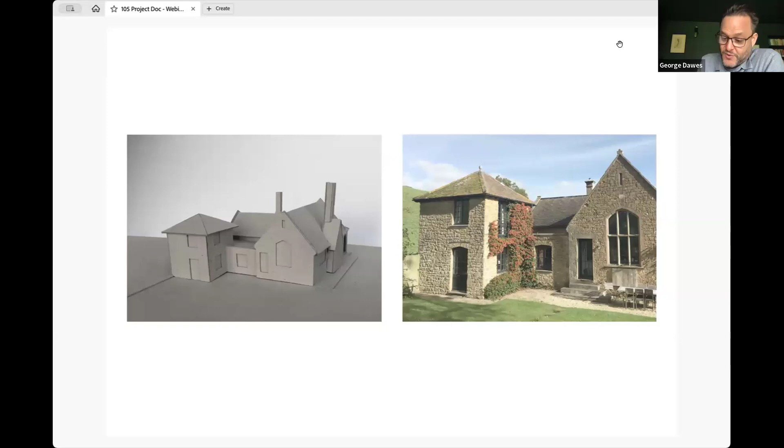So the proposal was to demolish the 70s extension, which was a useful process because it basically allowed us to go back to the original school building, which are these 2 elements.

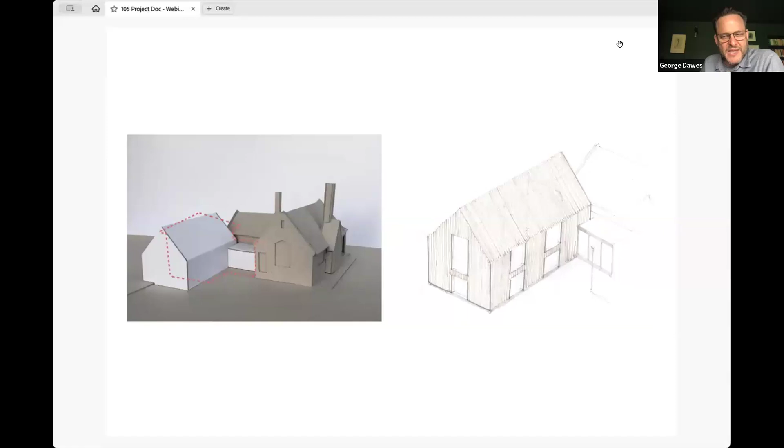Early on we came up with this idea of producing something that mimicked the original schoolhouse building, the main part of the schoolhouse, so it had the same massing, the same height, similar eaves, similar floor plan, but that it was clearly a contemporary extension, unlike the extension in the 70s that almost looked like it belonged in terms of its material and detailing. This is clearly contemporary, so that it's read as a later extension.

So this is the plan of the original building. The red was the 70s extension, and you can see how it overlapped the original building in a slightly unsatisfactory way. The idea with the new extension was to come away from it slightly.

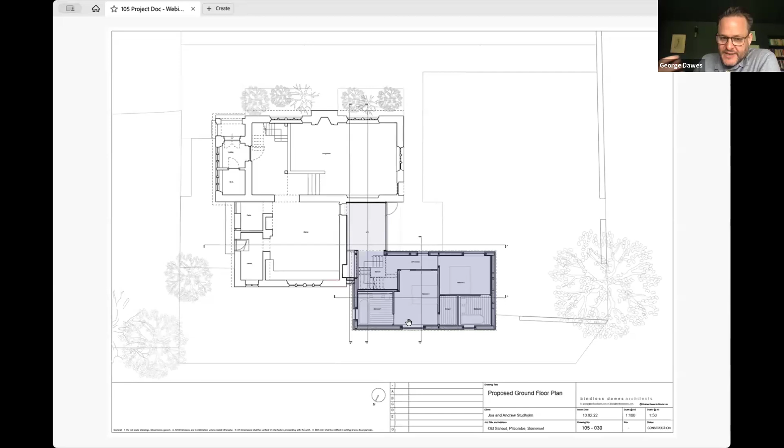There was still a link building, this section here, which is quite glazed, and there's a flat roofed element that's more diminutive in its appearance. But the main body of the building is read as a singular piece that stands alone. In terms of the section as well, the original building is above.

You can see the high eaves, and the challenge was to try and keep the building lower, so it had the sense of being a single-story building, although it had to contain still 2 stories worth of bedroom and bathroom. So it's sunk in its lower section.

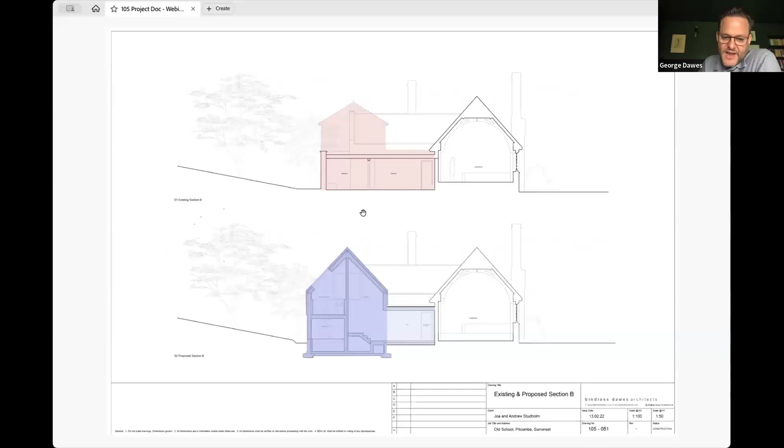So the foundations are in concrete with concrete wall upstands around it, and then on top of that is the timber building that sits over the top.

What's quite unusual about this is that when you're normally asked to do an extension, it's normally for a new kitchen or a new living space. And here what's unusual is the extension is actually the bedrooms.

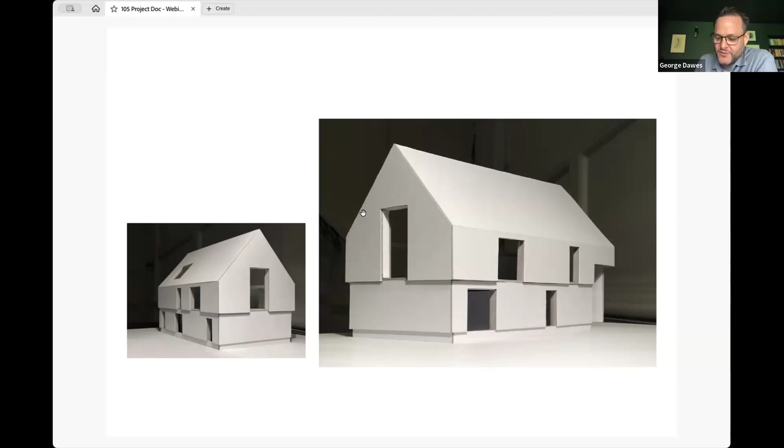So unlike most extensions where you end up with large expanses of glass, there are lots of smaller individual windows that serve different rooms. It's really about making sure the internal spaces capture that 360 quality of the site and utilize that. So that's a little background about the design.

The other big move was what to make it in, and we settled on timber quite early on. An obvious alternative was stone, but stone is more expensive, and although it's locally quarried, it's less sustainable than timber.

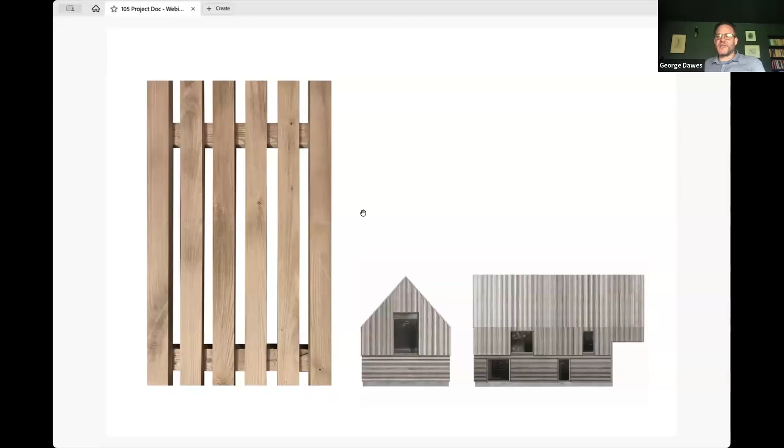Weirdly, I think timber is more contextually suited as well, because if we'd picked the same Hadspen stone, that would have been quite orange for many years before it started to weather and sit comfortably next to the original building. What's interesting about timber is that over time it can weather and silver to a similar tone and color to the original stonework.

As I said before, the shape of the building was very simple, and the desire was to do the whole building in the same material, so it had a singular contemporary quality. But then how to break that massing down - that was where a lot of work was done, testing different cladding combinations.

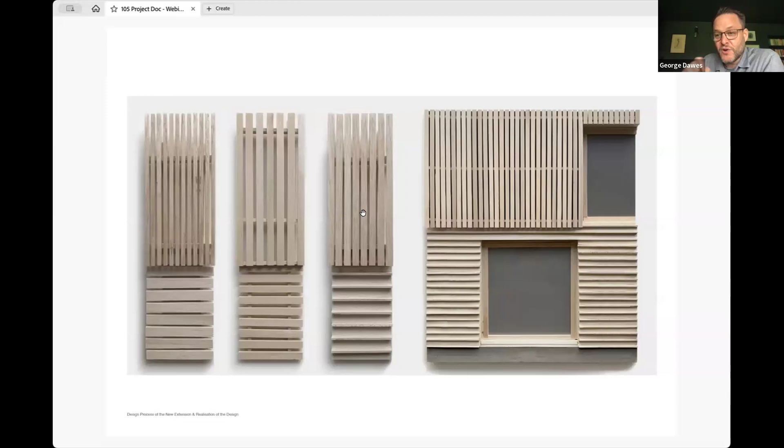We settled on this idea of using vertical cladding on the upper story and the roof. It was important on the roof that you had vertical cladding so the water could go in between the panels and dissipate into a hidden gutter, and then flipping that on the lower portion, taking the same rhythm and inverting it, both in terms of orientation and the smaller elements projecting rather than being gaps between.

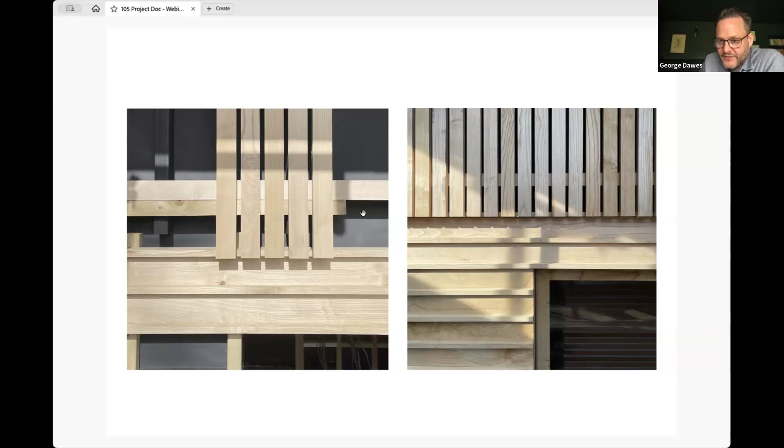These are site photos as it was first going on, and I'll come back to that in a second, and then its final version. The junctions and detailing between windows and corners was very important in trying to get that precision and crafted quality.

That superstructure basically ends up as a sandwich of OSB board with insulation and structural members inside, and OSB board on the outside. Internally, we had a vapor barrier formed using insulation-backed plasterboard, and on the outside was a breather membrane, so any moisture that does get in can escape on the outer side of the building.

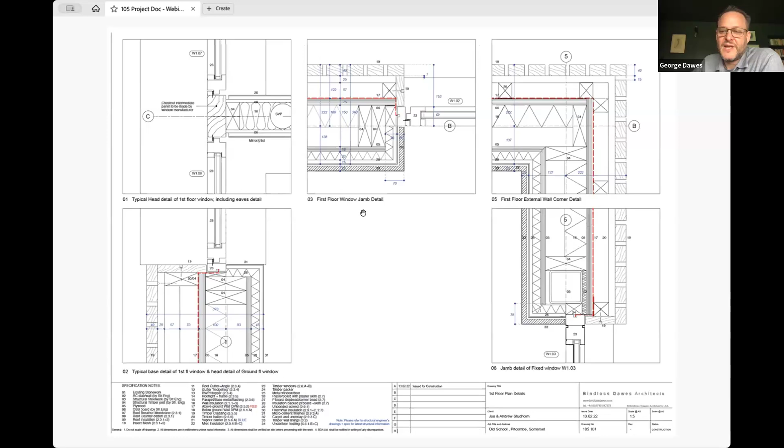And then cladding with the timber directly on the outside. What you can see here, because this is the upper story, is a vertical batten running down, in the direction that water would need to run as it comes through the rain screen cladding, with a horizontal counter batten to support the vertical outer cladding that sits on afterwards.

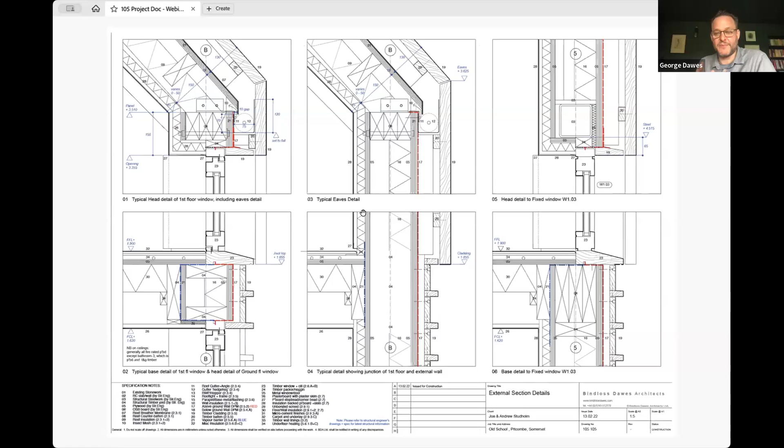You can see in the central section detail here the vertical cladding on the upper level transferring to the horizontal cladding on the lower section, and how, because you have a counter batten on the upper section, it facilitates this little step, which is quite a nice element as well.

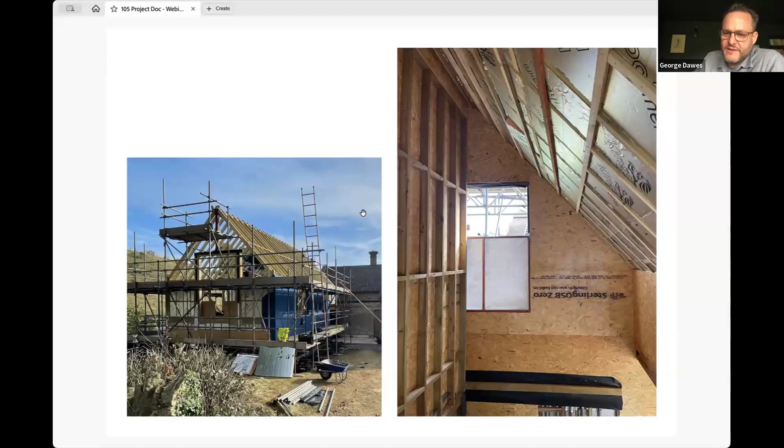In terms of a few construction photos, just to show some of that stuff I just mentioned - there's the timber frame with a little bit of steelwork on the left-hand side, and then internally framed out with OSB board, with OSB on the inside and on the outside.

On the outer skin there is then the breather membrane on the walls, which is a Renolit product, Alkorplan. And on the roofs is a slightly up-spec'd version of that product, called Alcor Solar.

What's quite interesting is I've got a little sample here - this is something typically used for supporting solar panels. It allows you to hot weld back to the damp proof membrane, so you don't perforate your roof surface, which is obviously going to receive a lot of moisture. Then you plant your horizontal battens and put the cladding over the top for the roof. With an open screen cladding like this, it's very important that the membrane is UV resistant as well.

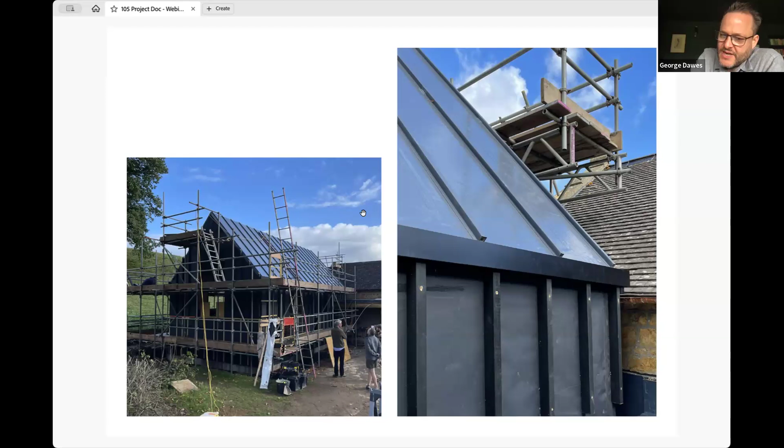Just showing you this as well - you can see here how the gutter's incorporated, and then everything is clad over the top. Once it's all covered back up, that all disappears. Getting it set out carefully to create these very crisp corner details was really important to us as well.

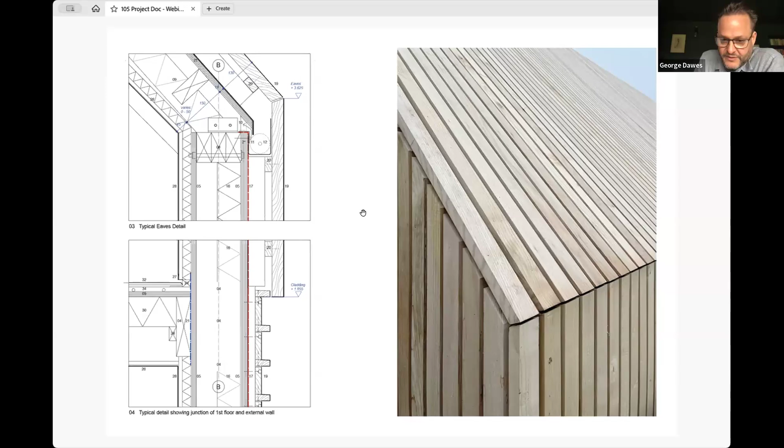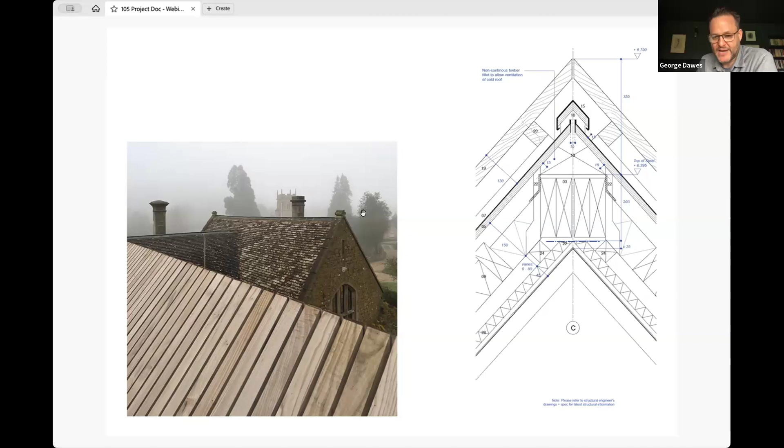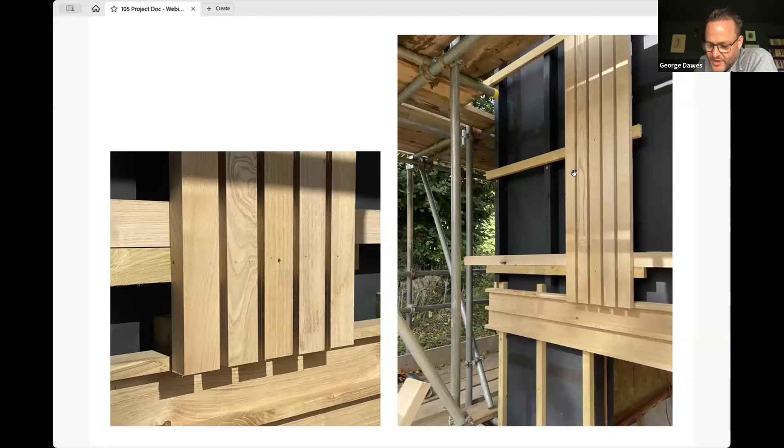Let's go to the next one. This is a detail axonometric we did after we finished the project, just to communicate some of these details and how they all came together.

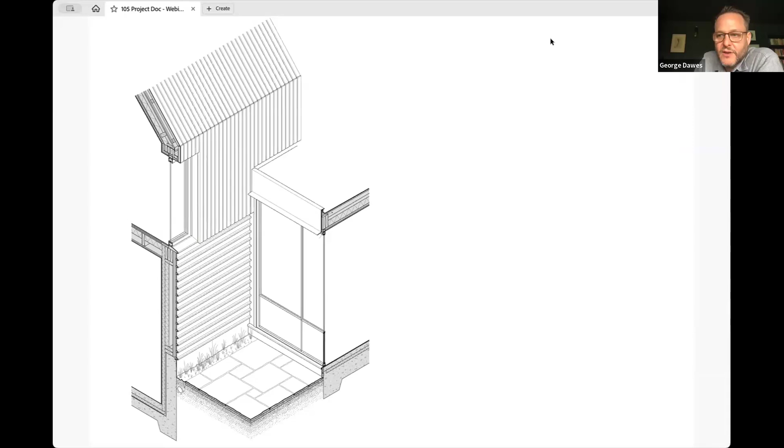So that's the final photo, so you can see the two together - it just shows that composition of how those details come together to form the whole.

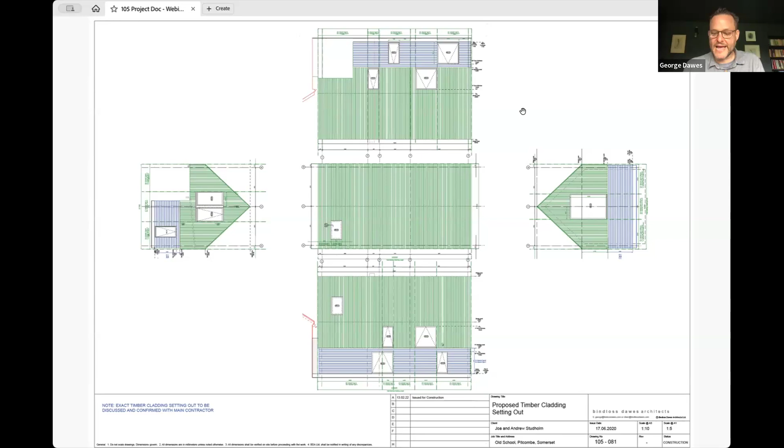This is just a photo of that end elevation. What's very important is the setting out dimensionally, making sure the spacing and rhythm of the timber worked with the windows and everything else. What was quite good about this cladding layout is that we could use the gap between the cladding as tolerance to set it out carefully on site. For example, the gap between the cladding is 15 mil, but in some instances it dropped to 14 to accommodate slight adjustments on site.

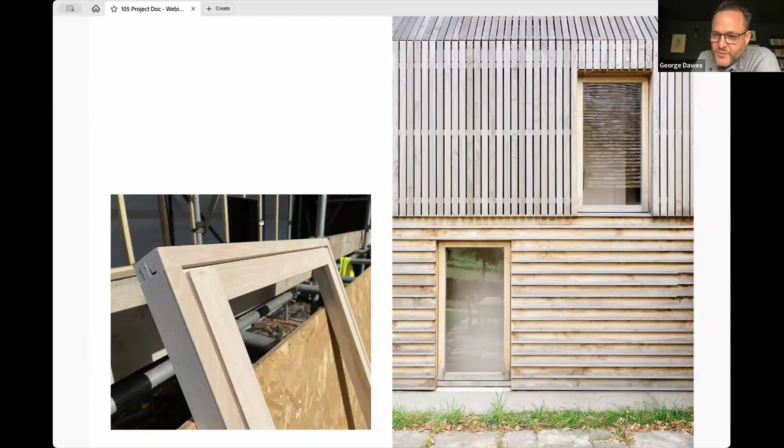This is a bit about the timber windows that we used. It was very important to us that they weathered at the same rate as the cladding. Quite often when you specify timber windows from a manufacturer, they insist on them being lacquered for guaranteeing purposes, so we had to get these made by a joiner. They used the same timber as the cladding, which came from Tom and his team, meaning the timber has weathered at the same rate and has the same coloration.

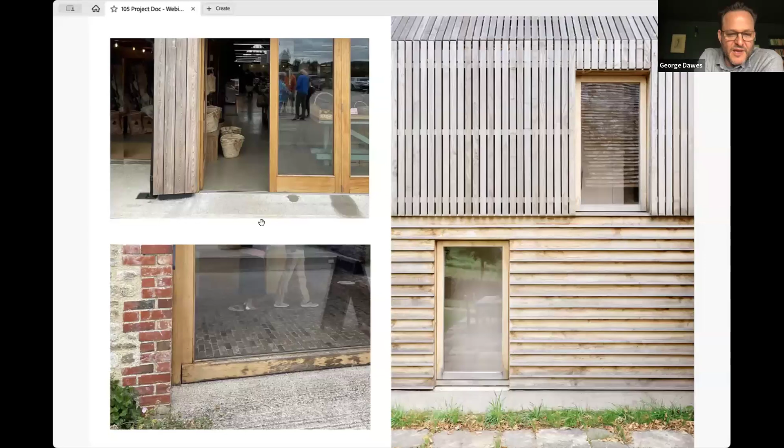This is an example of what can go wrong if you go down the lacquer route. The top image shows differential weathering between a lacquered window system and the cladding which is weathered - if that's the effect you want, that's fine, but it's just understanding that it happens. The bottom slide shows how the lacquer tends to split off over time, and you get this very variegated weathering pattern that takes place.

So just zooming back out now, this comes back to the point I mentioned earlier about how the timber has started to settle in tonally to the original building, but also to the wider context and the church. That's what worked very well with the timber, in the sense that it suited the landscape.

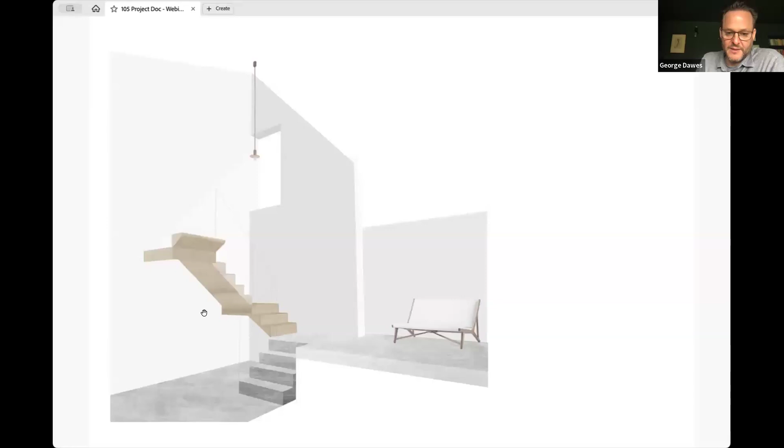Just quickly, a couple of slides. We also did a bit of timber internally. This is a timber staircase, also made in chestnut, obviously planed and finished, so it has a different quality. Also a bit of chestnut flooring as well.

Quickly on the interior - it's less relevant today, but just to say that the client is the colour curator at Farrow & Ball, so she very much took over the interior design. What worked quite well is that while the outside of the building was a single material, the inside became much more animated, and each room took on a different personality.

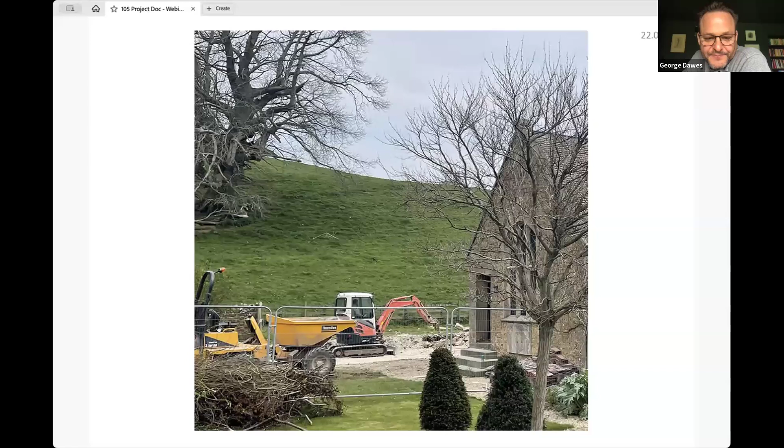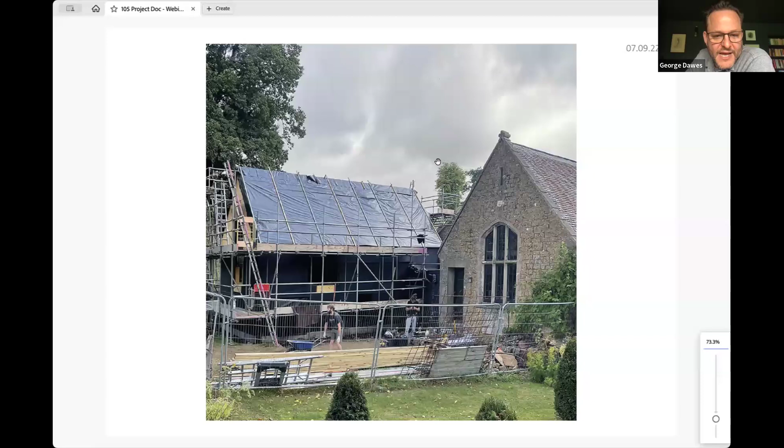Next slide. So this is the Renolit system forming the roof covering, the horizontal timber battens that then run lengthways. The structure starting to come in, and then the cladding going over the top.

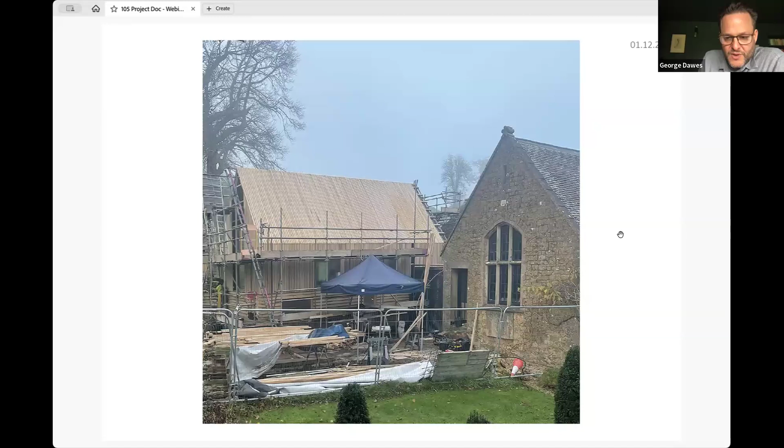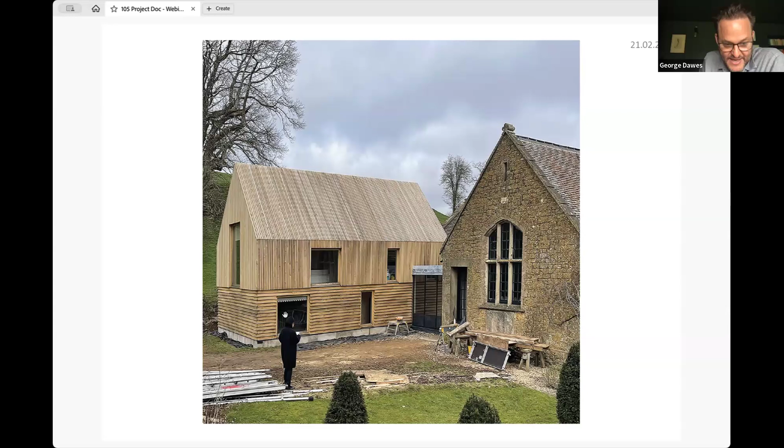What's also included here - this is fresh after the scaffolding came down. It's interesting to see where the scaffolding was, you see little bits of dirt settling on the timber. That was the level of the scaffolding, so that was something that was kind of unavoidable.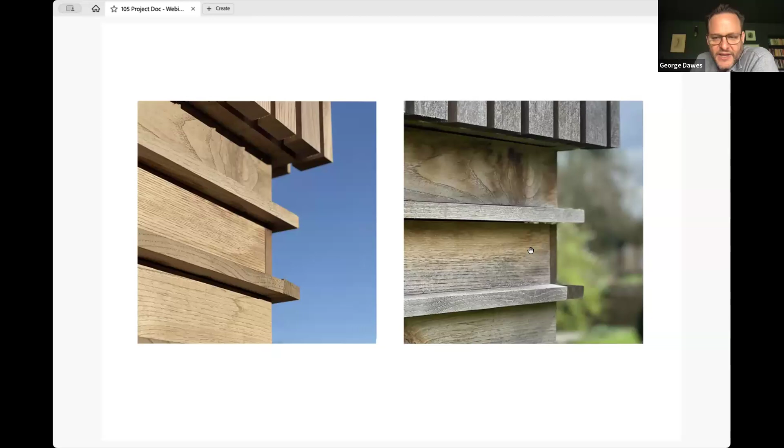This is a typical corner detail here, where the vertical panel meets the horizontal panel, same view again. You can see here how the idea of the horizontal on the corner, we alternated the cross as you went down, so you got this kind of tied-in detailing.

I just wanted to finish with a sort of word of warning, in a way. This is a project we were doing alongside at the time, also in Somerset, also from chestnut, and we experienced quite a lot of tannins coming out of the chestnut. It was quite shocking when it first happened, and it wasn't as we expected.

This is actually much more - this is for a garage and workshop - much more open weave cladding here, and the rain got behind and it washed out very quickly.

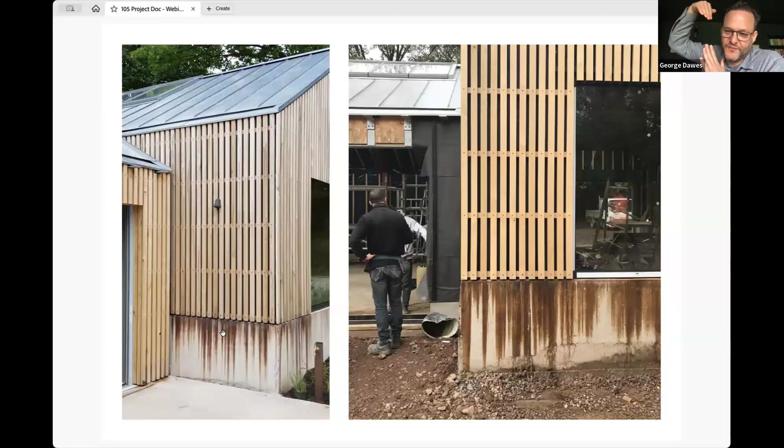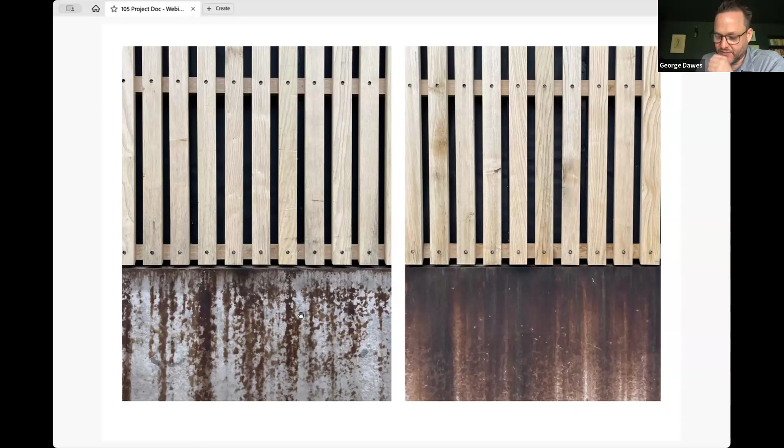The difference here is we've got this high concrete upstand, and the face of the concrete is flush with the timber, so the water fell directly onto the concrete, and you got this tannin staining on the concrete, which we didn't expect, so it wasn't what we wanted, but it was kind of interesting - something we could have adapted a bit more.

The good news is it all washes off in time, so it's nothing that stains, but it was a shock at the particular moment.

So that is the end of my presentation.

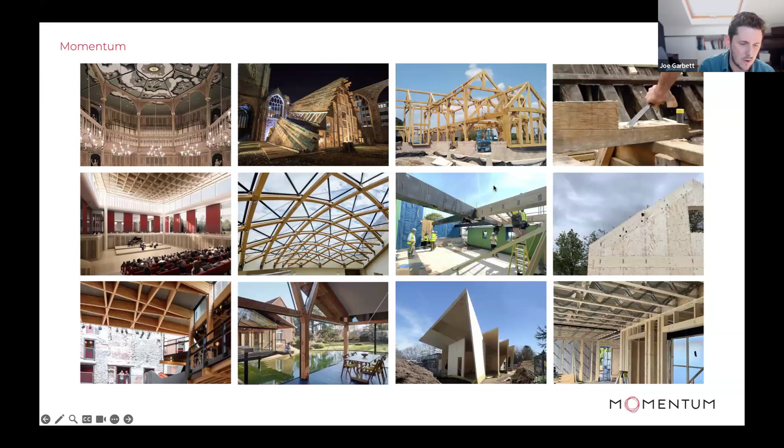Some of the key things here: one was to achieve open spaces and really achieve the architectural vision to keep the internal space as free and open as possible, and to do that with simple timber framing, keeping it as efficient and cost effective as possible. We also had to consider working adjacent to the existing grade 2 listed structure, which I'll touch on a little bit too.

So here's a cross section through the new structure. It's a very simple timber frame with localized steel elements that really open up this space. As George mentioned, the ground floor is lowered to allow us to fit 2 stories into the structure while maintaining the eaves line and the ridge line to reflect the original building.

That's done using a raft slab with a reinforced concrete retaining wall, which forms this lowered structure, and also, as George mentioned, provides this upstand, so the timber structure itself is lifted off the external ground level.

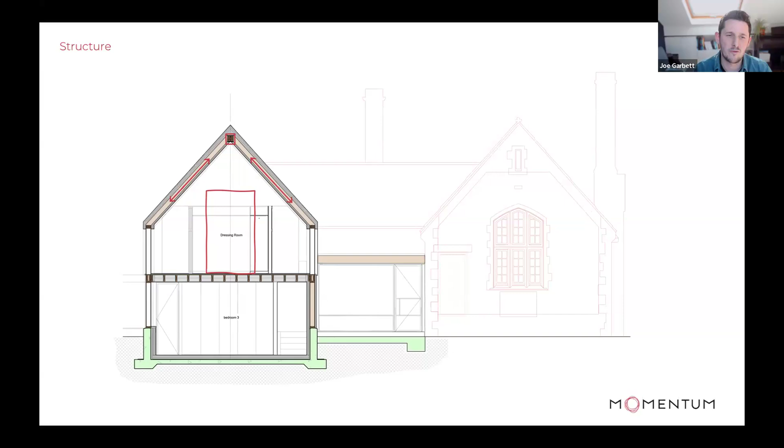So the final approach was to have a simple ridge beam, quite long spanning, that basically ran along the ridge line and picked up rafters simply spanning from wall line to ridge. That did mean introducing this steel element, but it actually freed up the whole first floor space to really maximize those volumes.

You've seen lots of pictures of this already, but you can see the window on the gable end that we had to frame round, and the link building next to the existing, which very much disappears with those build-ups. You can just about see the concrete upstand as well to the perimeter, formed by the retaining wall. On this project, it was about 250 mil that the timber was above external ground level.

So just to show you some of the structural arrangement - this was the lower ground floor level. You can see the raft slab there with the perimeter retaining wall, which had a land drain to the perimeter. Then you can see the internal structural walls starting to rise from that point.

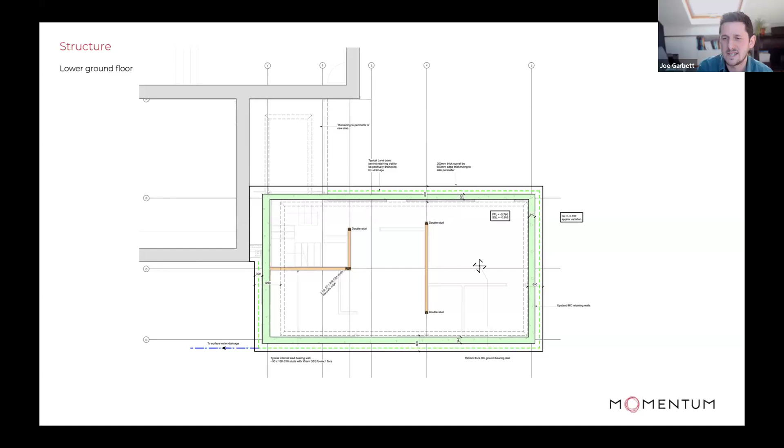Because we had this external concrete structure, it meant we could actually run the structural timber elements internally right down to ground floor level.

Then this is the ground floor level, so the top of that retaining wall, and ground floor level for the link beam, the link building.

Once we're above ground level, it's timber framing throughout with double studs and triple studs where we've got point loads coming into the main timber supporting structure. And again, the internal timber load bearing walls and racking panels continue up to this level.

Then once we're up at first floor, you can see on the right hand side we've got some additional steel framing there starting to form the large window and extend up to support the ridge beam above. You can also see an additional steel there, which again is supported on the external timber frame, but allows for this step in the racking panels.

So from ground to first floor we have a timber studwork wall that runs up, which you can see highlighted red there. Then from first floor level, that steps across to the steel line. So there's a bit of juggling in the structural system there, just to maximize the space at first floor.

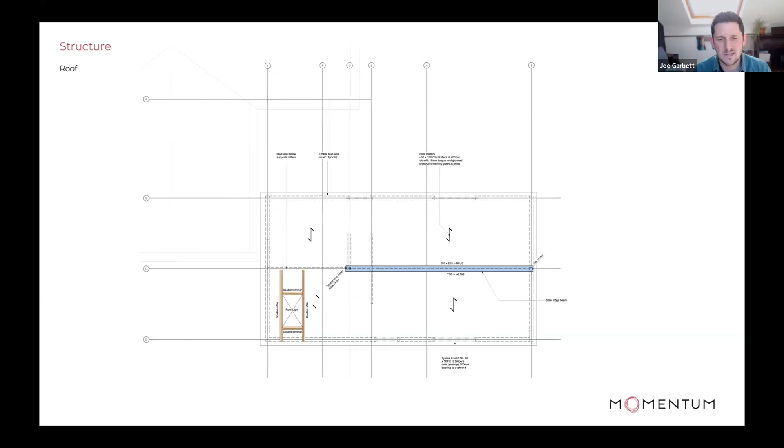At roof level, we've got our steel ridge beam that spans a reasonable distance, but because we're using steel, that allows it all to sit within the roof build-up.

So just a run through the construction sequence as well, quickly, because it's quite useful to see how that came together in more detail.

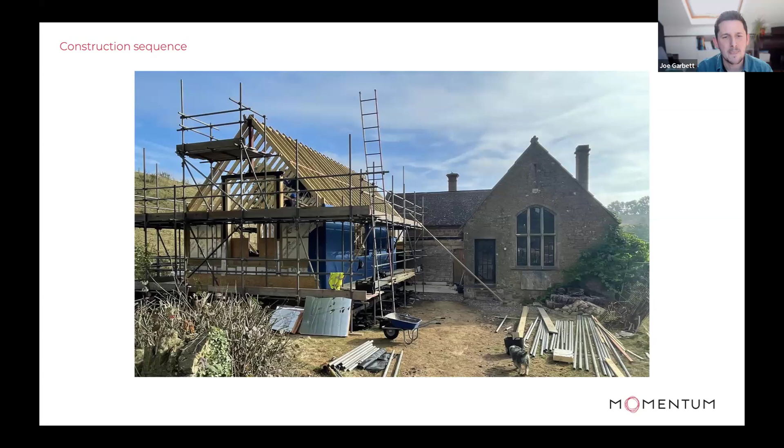So the initial work was to form the excavation for the lowered ground floor slab, install the perimeter land drain, the ground floor raft slab, and the small retaining wall to the perimeter. As I mentioned earlier, having this offset from the existing structure worked well in terms of limiting any impact on the existing structure or having to do any underpinning.

It gets slightly closer to the existing building on the left hand side there, but even so, through some investigation works, we were still working within the depth of the existing footing, so it meant we weren't undermining any of the existing structure or having to look at underpinning.

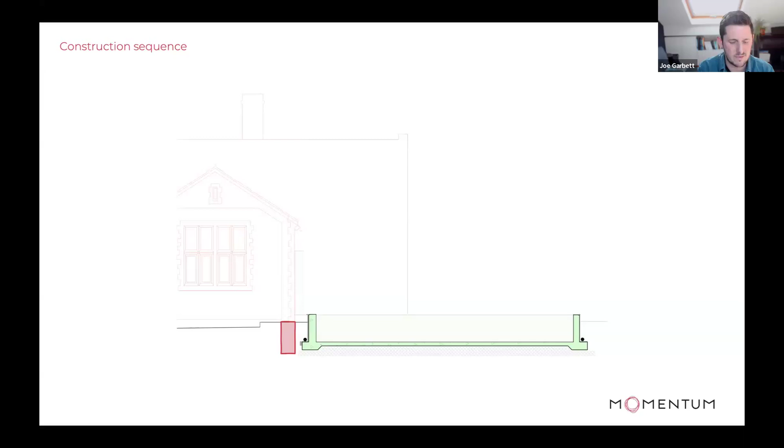From that point, we could then build up our timber frame, up to first floor, and that also incorporated the steel I mentioned earlier within the first floor structure, which would go on to support an additional stepped racking panel above it.

We then had some temporary propping just to support a double stud, which was quite a large double stud that ran up to support the ridge beam, and the steel framing on the other gable end that worked around the window and provided support to the ridge beam over. That meant that could all go in, and then the rest of the timber frame could be built around that.

From here, we could then continue the internal racking panel that went right up to the ridge line on the left there, and build the remaining timber framed walls.

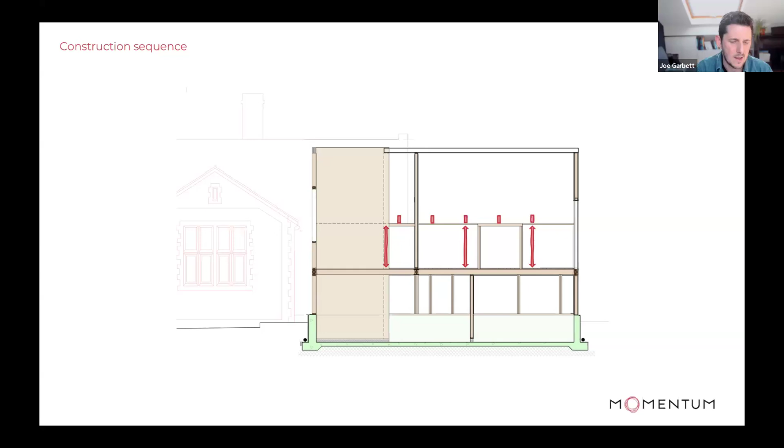We also had some additional temporary works here - temporary ties that ran between the eaves line on each side of the building, which held the walls in place before the rafters went on, and also provided a sort of temporary platform of sorts. There was also some additional propping there.

And then finally, the rest of the external skin could be applied, as George has mentioned, and Tom will talk through in more detail. Through that approach, the internal space could be maximized with really clear open spaces, creating this beautiful internal space which that dog seems to be enjoying.

So a few final images of the construction before I pass over to Tom. You can see here, this is the lower ground floor slab, raft slab in place with starter bars ready for the retaining wall.

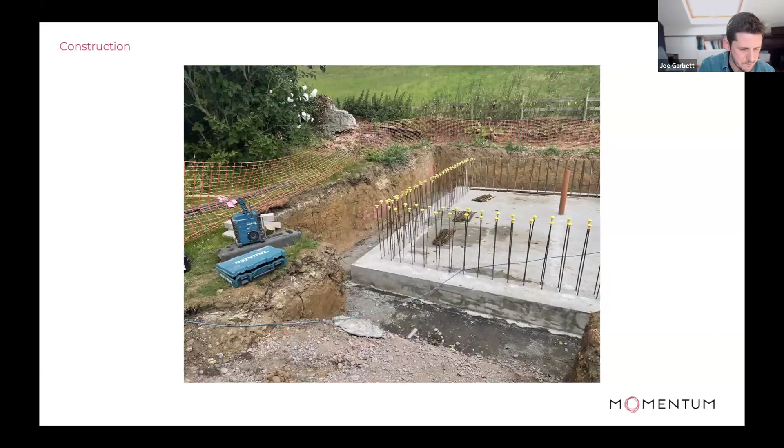And then we've got the formwork in place for the reinforced concrete wall. From there, we can build up the timber frame up to first floor level, and you can see the steel framing going in for the ridge line.

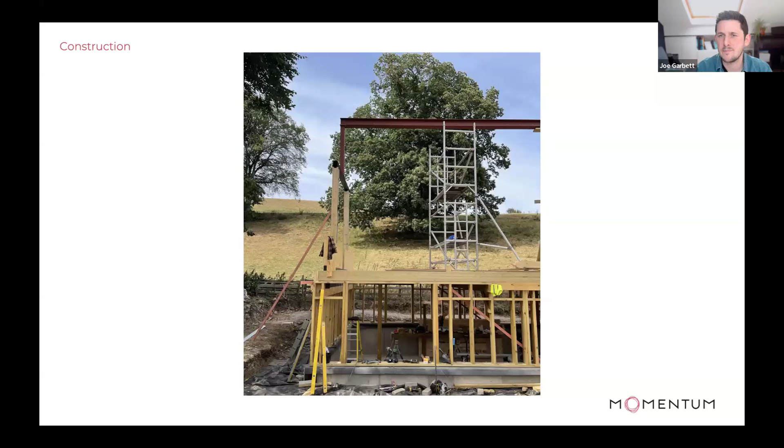Here you can see sheathing boards ready to go onto the timber frame, and the temporary shoring for the steel at the far end of the ridge.

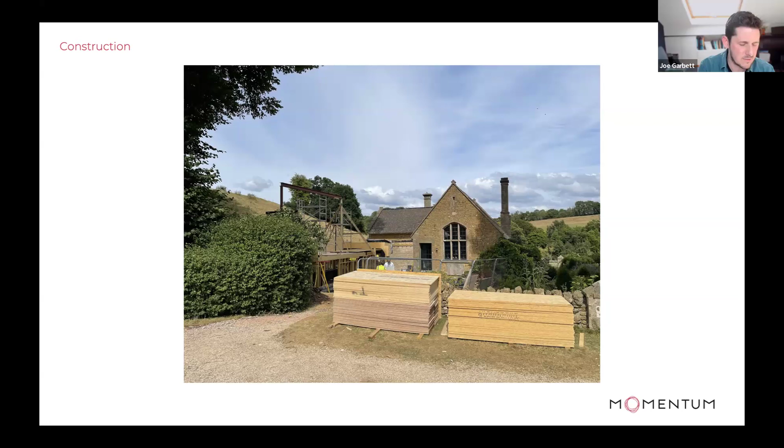Once the ridge beam was in place and the first floor studwork walls were in place, then the rafters could be installed, which were slope adjustable hangers to a timber infill to the steel web.

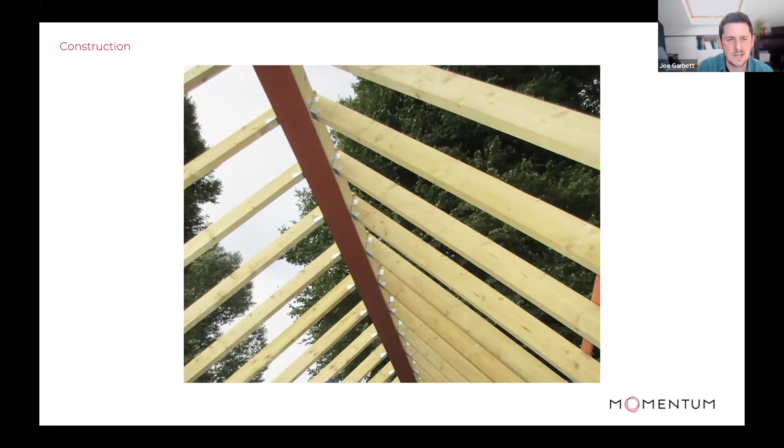Where the ridge beam met the timber racking panel, there's a simple detail here with a flitch and a bolted connection to the vertical studs.

Some people are sometimes surprised about steel elements being supported on timber frames, but as long as it's carefully detailed, it's effectively a flitch connection with the load transferred to the timber through the bolts. So relatively straightforward.

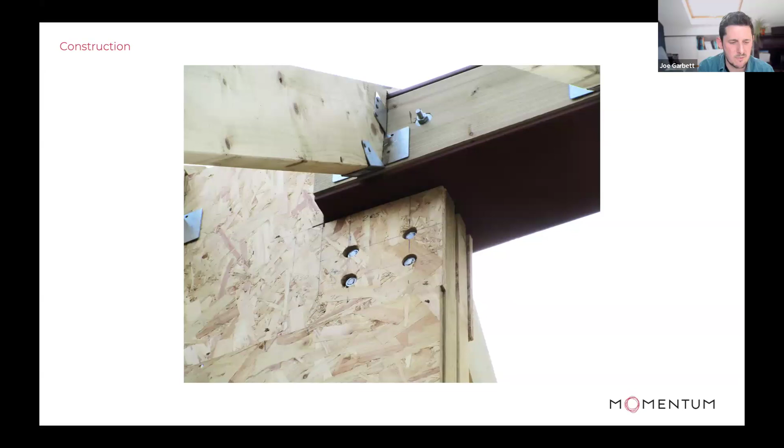Here's a quick view of the first floor level with the temporary timbers running along the head of the walls, and you can see some temporary props just supporting that studwork wall.

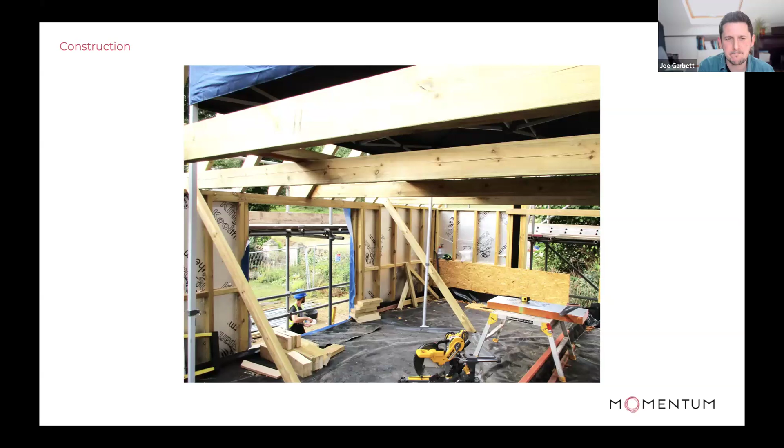And here's a view of the rear of the building with the sheathing starting to be installed, so you can see the external OSB boards being applied, and the internal racking panel that runs up to the ridge beam, which runs full height of the building and helps with the stability in that direction.

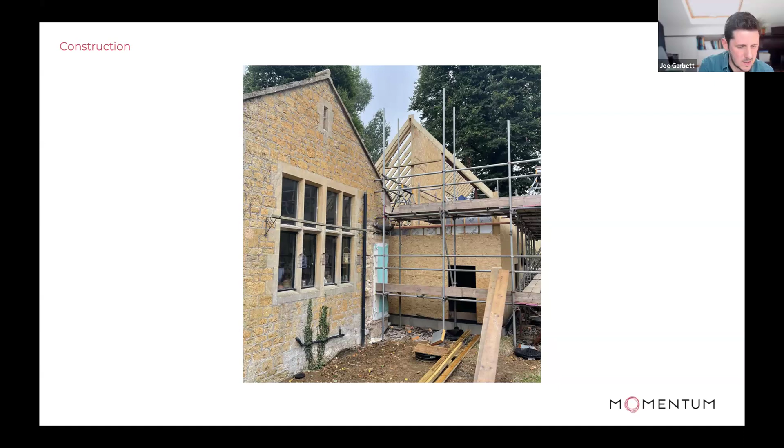At this point, the structural frame is near completion, so membranes are starting to go on, for the external cladding to be installed. So at that point, I'll hand over to Tom.

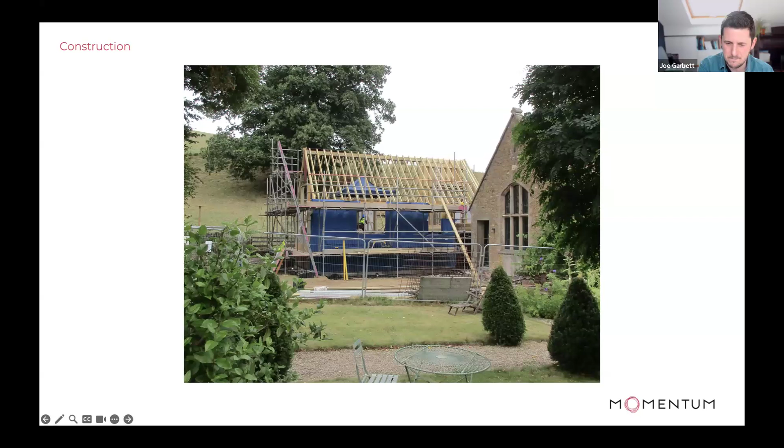What I want to focus on and share with everyone is how we go from a tree to a piece of wood that architects can design to and structural engineers and carpenters can affix. So it's our little story of tree to final product for us.

Our journey to get some wood for construction starts about 2 years before our customer might order it. We're actively creating stock that's then available for people to use. We love sweet chestnut because it's so versatile.

The journey of this particular supply started in a forest not far from here, Stansted Estate, a beautifully managed estate in Hampshire. Here, another dog and myself with the forester, literally selecting trees and cutting them down, ready to take to the mill.

We like to cut chestnut in the winter, in fact all hardwoods in the winter, because the sap is down, and that allows us, our objective ultimately is to get moisture out of wood. So if we start with less of it in the tree, the better. These trees are cut, taken by lorry to a mill, and their conversion process starts then.

Once they're at the mill, we lay them out. Trees, funnily enough, are not straight, and chestnut particularly tends not to be straight. Usually the longest lengths we can cut or cross cut are between 2.5 and 4 meters, and that's just the natural form of the tree, how it grows. That fundamentally can be a limiting factor in your maximum length. On the roof, 4 meters was just about what we needed, but that's usually the maximum length in solid sweet chestnut.

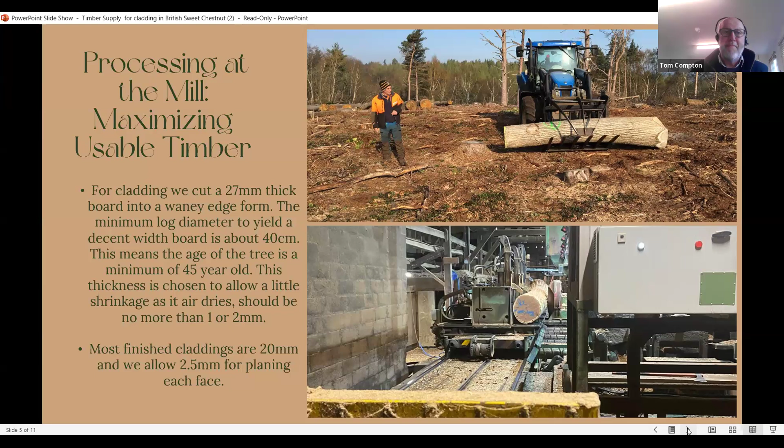For cladding purposes, we cut a thickness of 27 mil, into a waney edge form. To get a decent width board, you need about a 40 centimeter wide log, meaning the tree is roughly a minimum of 45 years old. We choose that thickness to give us maximum yield but also allow a little air shrinkage as the tree loses moisture. Most cladding finishes are about 20 mil, and from a sawn board we allow maximum about 2.5 mil per face, so we work backwards from the finished size to a sawn size.

Straight after sawing, they're put into packs, which allows the air to circulate on every surface. You'll see very nice neat stacks where the weight is transferred right the way through the sticks to the bearers to the ground on a flat surface. It's important to get that right, because if it's not flat, the wood will take the shape it's given, and you'll never straighten it out again.

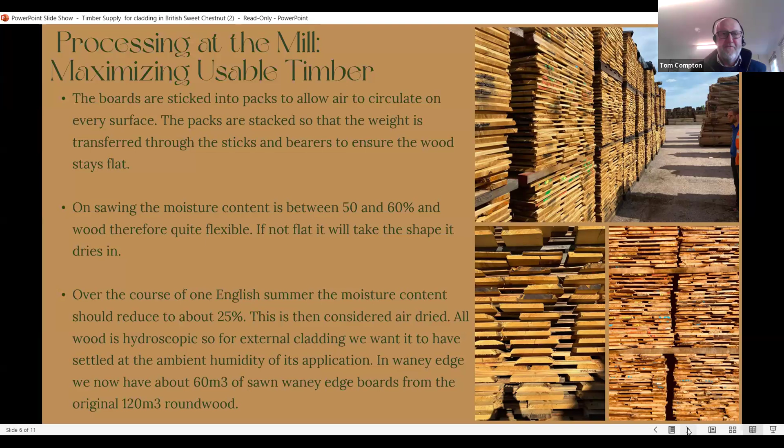In conversion terms, we started off on this particular path with about 120 cubic meters of round wood. We get about a 50% conversion, so we end up with about 60 cubic meters of sawn board. From that stock, we can then apply it to the demands of architects and builders, and it's available to produce.

In chestnut, because of the way the trees grow and how it's used, widths greater than 150 mil, 6 inches, are quite hard to achieve in big quantity, and are in any case prone to cupping. A very nice feature of this project was that there were narrow widths, so whether George intended it or not, the utilization of the yield at that width was very, very good.

Once the order is placed, we take those boards and cut them in a secondary process to size. We're looking out for other natural defects you might have - heart, end splits, knots, brown stain - and we want to produce a clean square edge blank ready for planing or profiling.

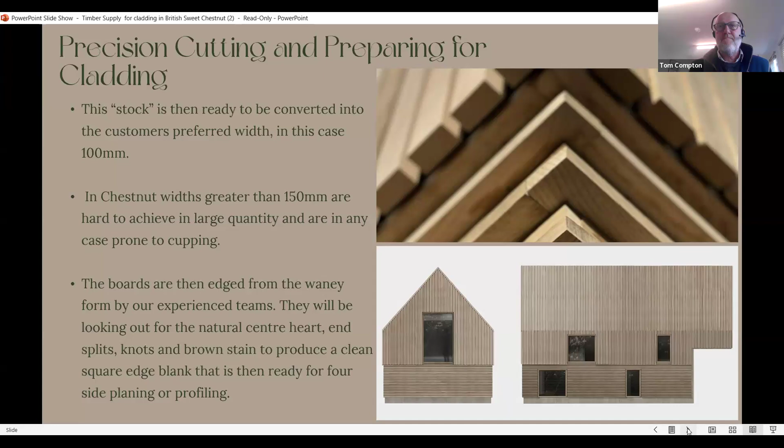In conversion, whenever you're producing one particular size from a waney edge board, it's always quite challenging. It's really nice and helpful if you have more than one size, but that's just a timberman talking.

In chestnut, the sapwood is actually very narrow compared to something like oak, which can be very broad. So from that sawn 60 cubic meters, we then expect about 40 cubic meters of squarage. So we've gone from 120 to 40 - it's quite a lot of conversion.

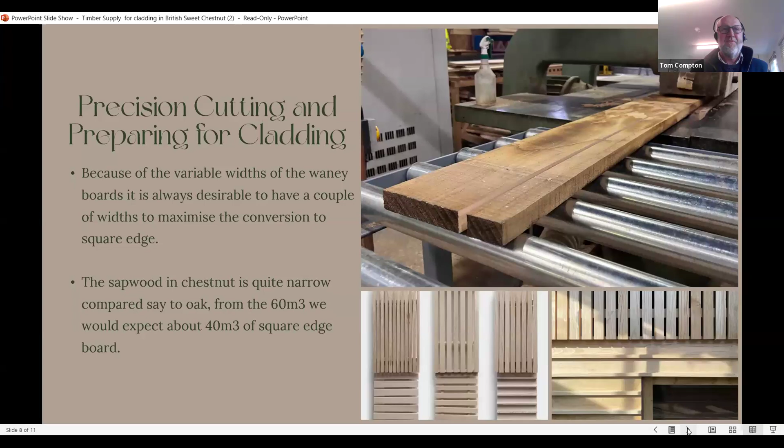Through our planing process, any final quality issues become very evident. They're then defected and the material is ready to take to site.

It's really important with English hardwoods and chestnut to help - it's really important that the natural features of those woods are incorporated into sample panels or the client's understanding of what they're getting.

Durability, chestnut is such a wonderful timber. It gets its durability from a very high tannic acid content, and that makes it very resistant to fungal attack. But it does bleach out, and eventually that can go to a very dark color.

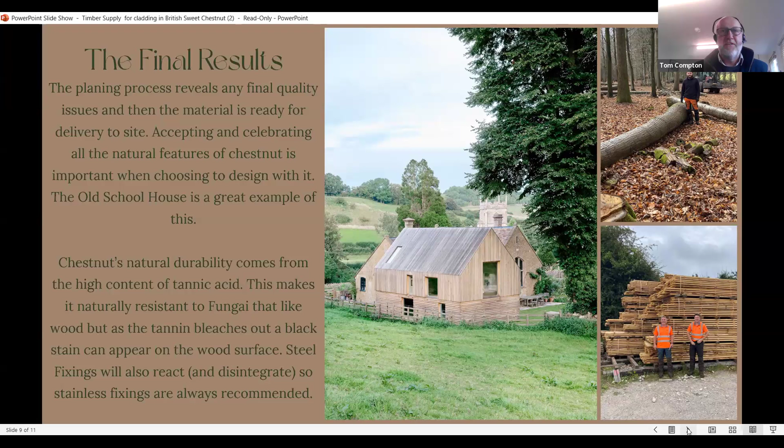Very important, the fixings you use, stainless steel please. Anything ferrous will react not only with the wood itself and produce a stain, but the fixings themselves will disintegrate. Always use stainless steel with chestnut or oak.

If you're thinking of using chestnut, just a few tips: contact us early for availability, and think carefully about your orientation. Interesting that this project had both, because that determines the profile options that are suitable, either horizontal or vertical, to allow the water to be shed.

Lengths, ideally no longer than 3 meters, but one can do longer. Think about fixed or random lengths. Fixed lengths tends to put the price up, while random lengths gives you a better yield, and therefore the cost is less.

Widths, anything from 50 to 145 mil is possible. It comes out of a waney edge form. We can adapt the stock to your project.

The way that we can help builders and architects is, you tell us exactly what you need, and we'll produce exactly what you need. So you minimize - you should have very little waste.

But we do ask you to finalize those cutting lists well in advance. Please don't call us two weeks before you're about to install with what you need. It may not be possible, or it will come at a high price.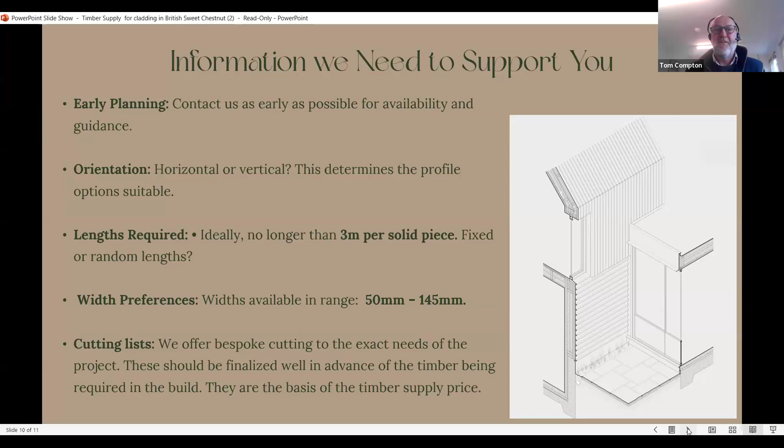Thank you. It's a wonderful project to have been involved with.

Thank you so much, Tom, George and Joe. Those were really, really great presentations. I can see you have been busy answering lots of the questions that have come in from our audience, so thank you for that too. Really great, because a number of questions had been asking about the treatment potentially needed for the sweet chestnut, and you were explaining that they don't need to be. So it's really great in one of those last slides of yours, Tom, explaining about the kind of natural resistance, which is why the material doesn't need to be treated.

I think there are a few more questions, and we've got a little bit of time to pose some of the remaining ones. If our presenters will have a little look through too, if there are any that you would particularly like to answer live, do let me know.

One thing I had wanted to ask, I guess, of probably both George and Tom, was whether there were any other timber species that you had been considering for the external cladding, and why it was that you chose to go with sweet chestnut in the end, why that was seen as the most appropriate option for the project.

Well, I could just start. The reason why we chose chestnut over, for example, oak or cedar or larch, which I think are the other ones that are often used - firstly, I think chestnut is slightly cheaper than oak, and it's also more stable, I understand as well.